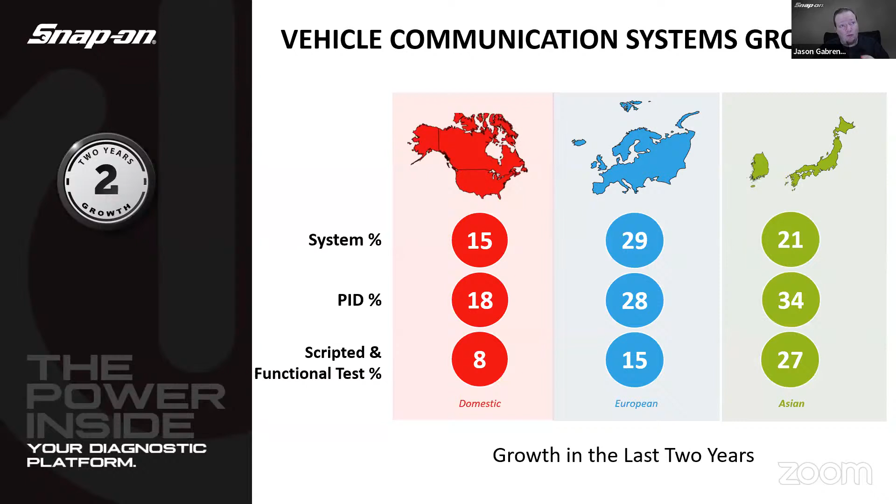So we're always adding that coverage, and we're really focusing on the stuff that's in the shops right now by using our SureTrack information, and then the repair orders and all that. We know what's in the shop, we know what's getting worked on, so we focus on what's being worked on right now.

And speaking of that, no one else in the industry can offer as much information as we do. 40 plus million real fixes, those real world complaint cause correction tips written by real technicians, billions of repair events, hundreds of billions of scanner data points helping provide our fast track intelligent diagnostics information, millions of fast track guided component tests, and over 22,000 total location images available.

So those are the color pictures that we started adding a couple releases ago, where it shows you an overview of the engine bay, points to where it is, and then we show a closer detailed look at where the actual component is.

There's over 1 million service resets and relearns. So if you have one of the tools that has that service resets and relearns menu underneath clear all codes, that's quick access to any of the resets and relearns on the vehicle based by job. And there's over 1 million of those available now.

Over 5 million fast track intelligent diagnostic PID flags. So if we think about the smart data tab that is in there, there's over 5 million of those available. And it's not just on engine, it's on body systems, chassis systems, and more. 700,000 more PID flags were added in this release alone, and that gets updated pretty regularly.

Talk about real fixes again, coming into SureTrack. So some tools have SureTrack, some tools have fast track intelligent diagnostics, but they all basically pull from the same data. Real fixes, hundreds of billions of scanner data points and billions of shop repair events give us over tens of millions, over 10 million real fix tips.

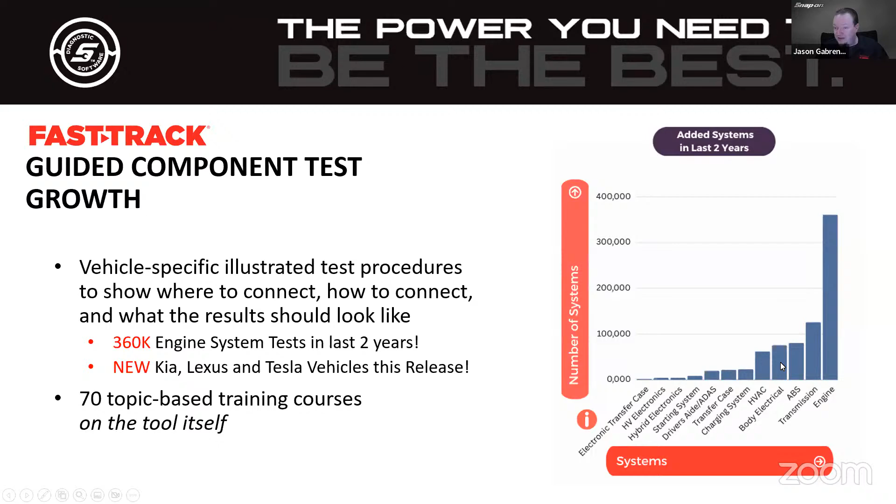We can also see over 100,000 more transmission tests added, almost 100,000 ABS and body electrical tests, and so on and so forth. I'll be honest with you, this very large engine number kind of skews the graph a little bit, so we can't see the detail at the bottom, but thousands and thousands of additional new tests were added every single time we do a release.

Also with this release, new guided component test instructions. It used to be we had small pictures with little arrows pointing on the tool where to plug in. Now they've been enhanced with much higher resolution graphics specific to the tool. Here we are connected to an engine coolant temperature sensor, and you can see the scope module there, with the black channel and the yellow channel, channel 1, and there's where to plug in.

And then down here we have the battery, and if we scroll further down, which I'll show you a little later when we go live, it actually shows you where you would back probe on the connector as well. A lot more detail added, and we'll be adding more of these as time goes on, as updates come out.

Location images, talked about that. The last couple updates we added these in, and with this release, 3,000 plus more new locations added. Here's an example that looks like a vent solenoid, and down here we have some variable valve timing actuators where they press on the center of the camshaft. So details like that—if I've never worked on this vehicle before and have a rough idea where it is, these detailed pictures help you and will point right to it.

Many locations also offer multiple images to provide a view of the area and a detailed view of the component.

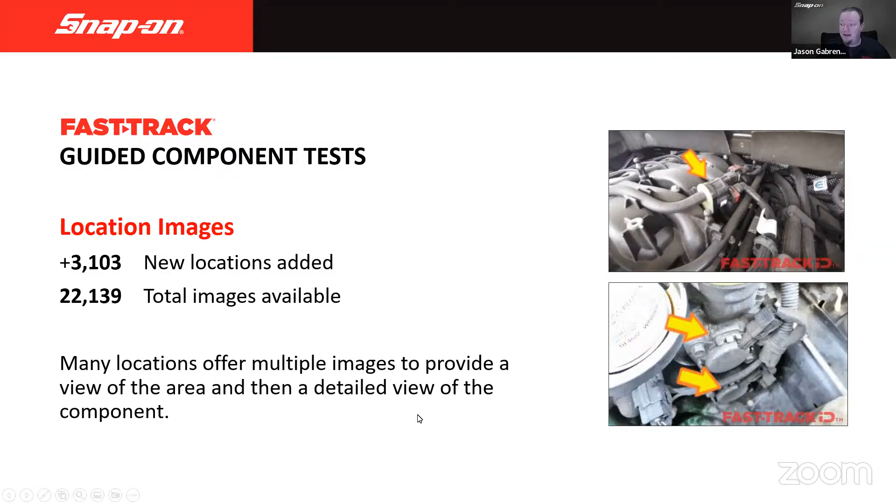As I said earlier, over 1 million service resets and relearns now in the tool—quick access to the work-related functions. So let's say I replaced the windshield. What might I need to do? It would have maybe a camera calibration test that I needed to do. Or I replaced the brake switch, or I need to replace brake pads. It would walk you through all those different tests and functions, filtered down just to the test, so I don't have to look in different modules to find these resets and relearns. It's going to give you the core repair plus any other associated component.

Fast Track Intelligent Diagnostics PID flags—if you go into the smart data, these are the min-max values, and they will monitor those PIDs, and if it goes outside of spec, the flags turn red. There's over 700,000 more added in this release, and over 5 million available across all the systems and codes that we cover. It's in things like transmission, brakes, hybrid vehicle and EV systems, tire pressure monitoring, body electrical, and of course we started with engine, so it's in there as well. More systems being added all the time.

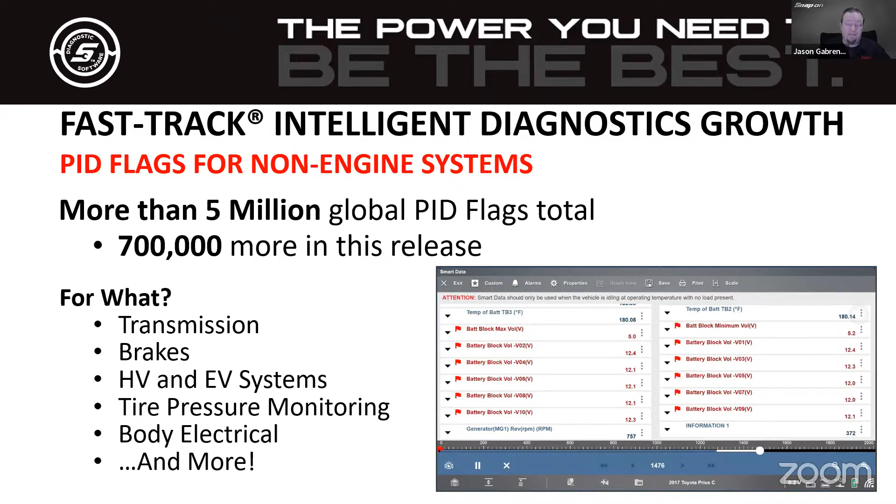We also have a new make added in Tesla. We're going to talk a little bit more in detail when we get further into the presentation. But yes, we have a new make in the tool that we cover, and it is Tesla, one of the highest selling vehicles in North America over the last couple of years. We have pretty darn good coverage on that.

Also new models—maybe we already had the brand, but some new models have been released. The Alfa Romeo Tonale, vehicle communication software, so that's your scanner stuff. The Kia K5 and guided component test added. Lexus NX series, the NX 250, the 40, the 350, and the 500H—guided component test added for those. And as I said, Tesla S, X, Y, and 3 vehicle communication software, as well as guided component tests in there. We'll look at that in a little bit more detail going forward.

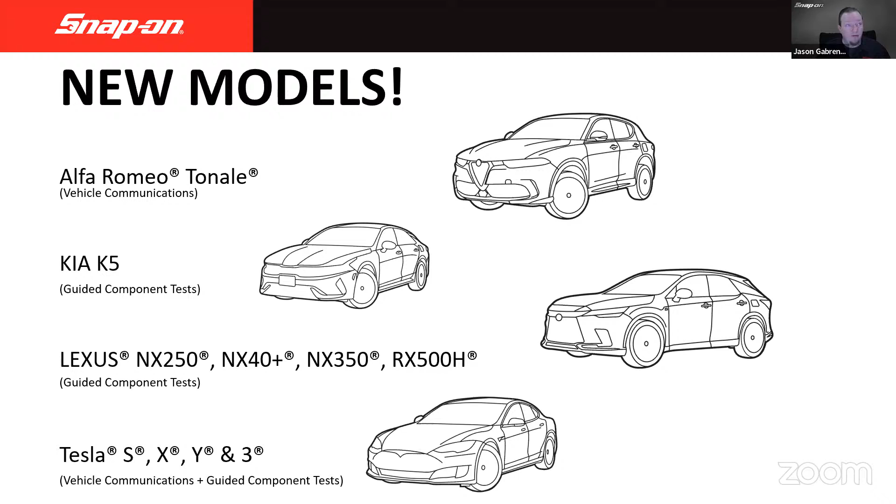2024 model year updates. At the beginning of the year, we always have at least code scan and clear on all vehicles because we know sometimes you might need to do a pre-scan on a vehicle with 5 miles on it that's brand new. So we have that in there so you can at least scan the systems. And then as we go, we add in more—the engine, transmission, body control modules, brake control modules, all those other modules, codes, tests, functional tests, all that good stuff.

Let's talk about, get a little bit deeper into the coverage highlights, so we get a little bit more of the detail as to what's going on here.

As far as Honda is concerned, on the CRV we have engine and power steering control module. On the CRV, Clarity, and Civic, we have intelligent cruise control module, actuator tests, and special functions for all of those. And 2019 and newer Passport got engine actuator tests and special functions added as well.

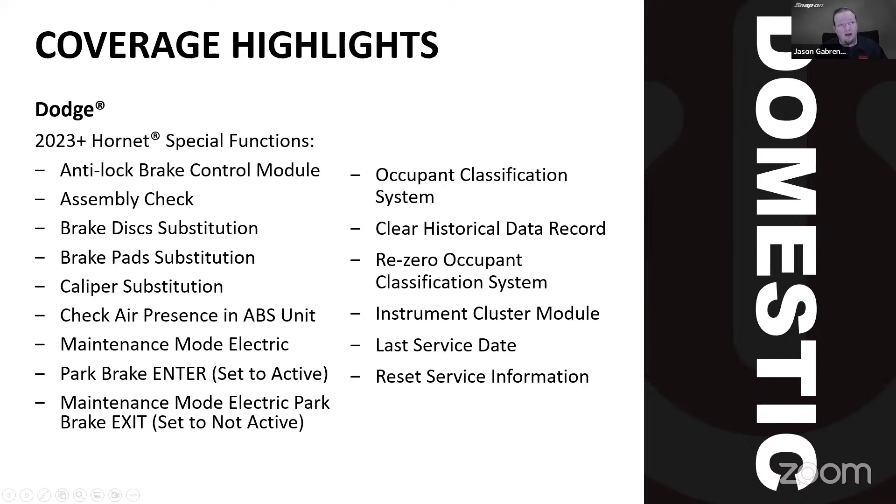Ford, this is a pretty large update for Ford. Actually, it's a very large update for Ford.

More PMI. We started adding PMI probably 3-4 years ago. PMI is programmable module installation. If you replace something on many newer Fords, you have to do this PMI, where you're copying the configuration information out of the old module and pasting it into the new module, because it needs all that configuration information. For example, changing a steering rack on an F series, you need to do that, and that capability got added a little while ago.

In this case, just some samplings of what got added: 11 to 17 Mustang for the power steering control module, for if you do a steering rack on that. Focus restraint control module, if you do that, you need to do PMI on that. 2023 and newer F series and Super Duties got new engines, so we get support for the Raptor, 6.8 to 7.3 gas engine, and the 6.7 diesel. And then 39 different new body control modules across the Ford landscape that weren't able to be accessed before are now able to be accessed, plus 2020 and newer F-150 special functions for ABS, the engine, occupant classification module, and the automatic headlamp leveling system.

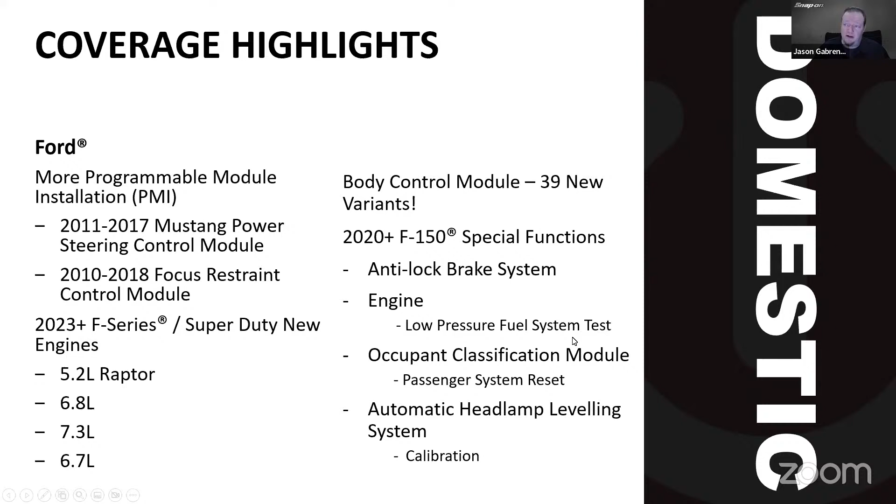This low pressure fuel system test is going to show up in a couple places, for example on the 2021 and newer Bronco. We added electronic power assist steering, a bunch of new tests in there, and that engine low pressure fuel system test, which can help you check for leaks—it automatically pressurizes the system and checks for leaks. And then the occupant classification module, if I need to reset the passenger seat, perhaps, if I replace the seat or anything like that, I might have to recalibrate that seat.

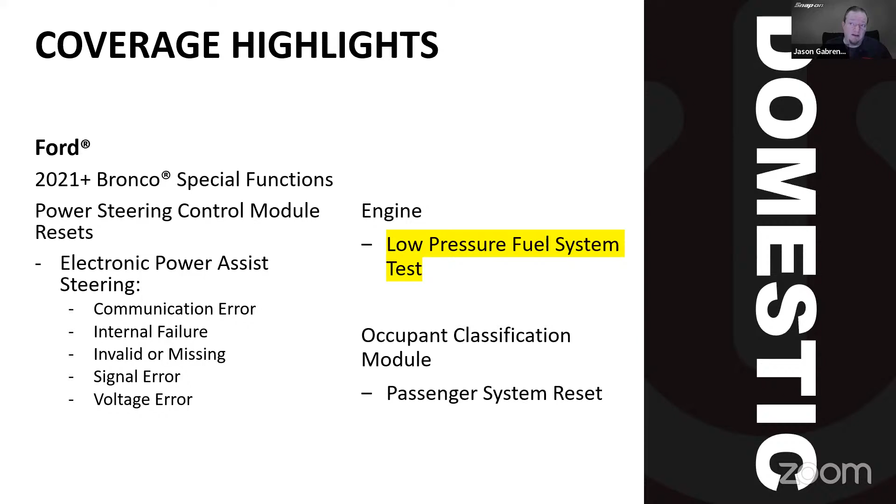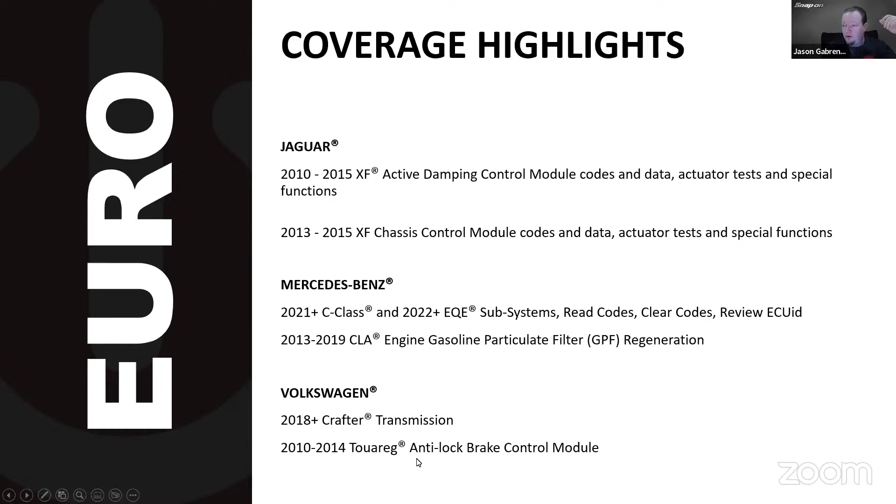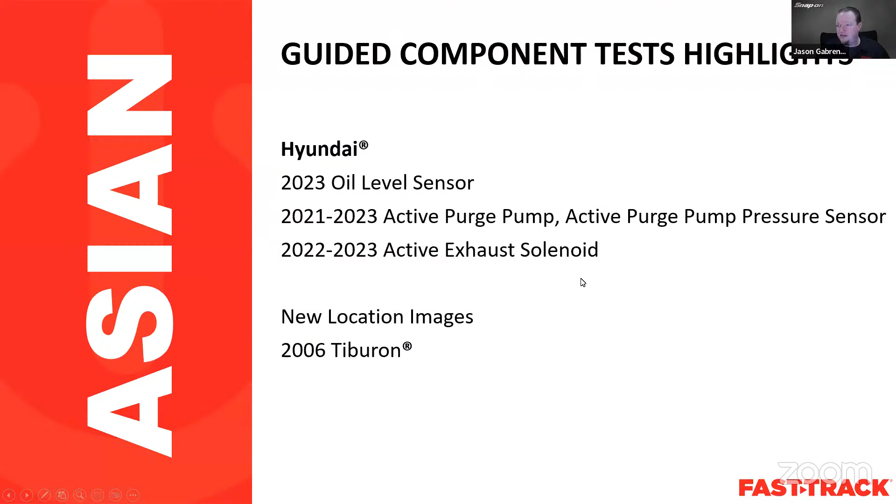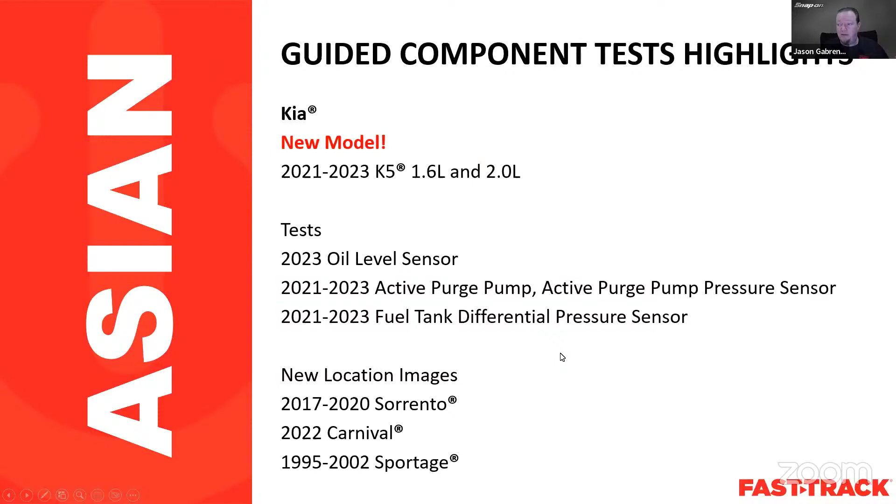Hyundai 2023, oil level sensor, active purge pump pressure sensor, active exhaust solenoid, and new location images added for the Tiburon. Kia's new model of the K5 on the 1.6 and 2 liter, all sorts of different things available. So like the oil level sensor, the purge pump, fuel tank differential pressure sensor, that could be helpful in evap diagnosis. And new location images on the Sorento, Carnival, and Sportage.

Chevy Colorado Express, Silverado, Camaro, Trailblazer, and Equinox, all new engine coverage. The 3-liter diesel engine in the Silverado, the smaller diesel that they introduced, so coverage on that. Increased coverage for transmissions on the 6, 8, and 10 speeds on the Silverados. I know that's been highly requested, so that's in there, so you can test the solenoids and things like that.

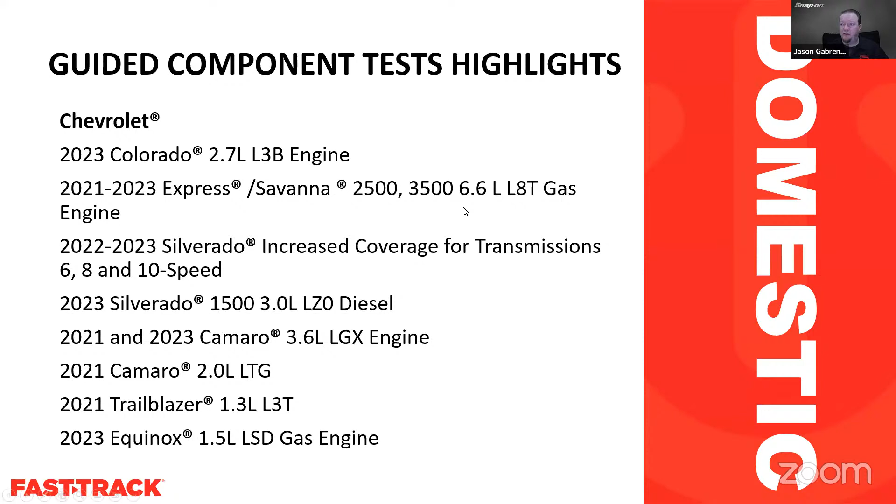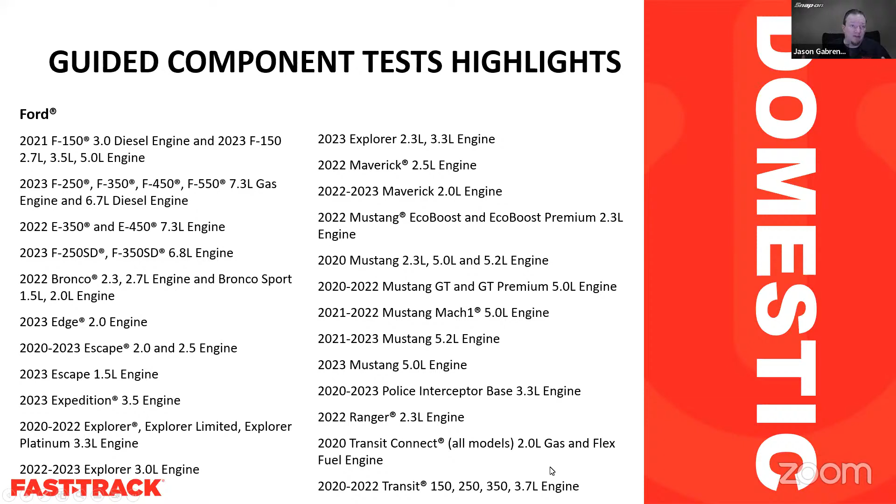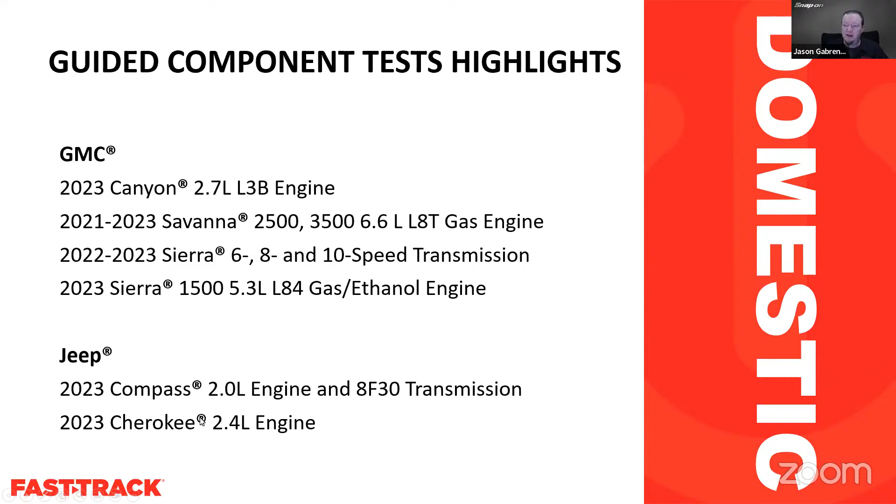GMC is going to pretty much mirror what we did in Chevy, since they'll match Silverados to Sierras and so on. So more transmission stuff, more on the 6.6 liter gas, the 2.7. Jeep Compass gets coverage on the 2 liter and the 2.4 and the transmission.

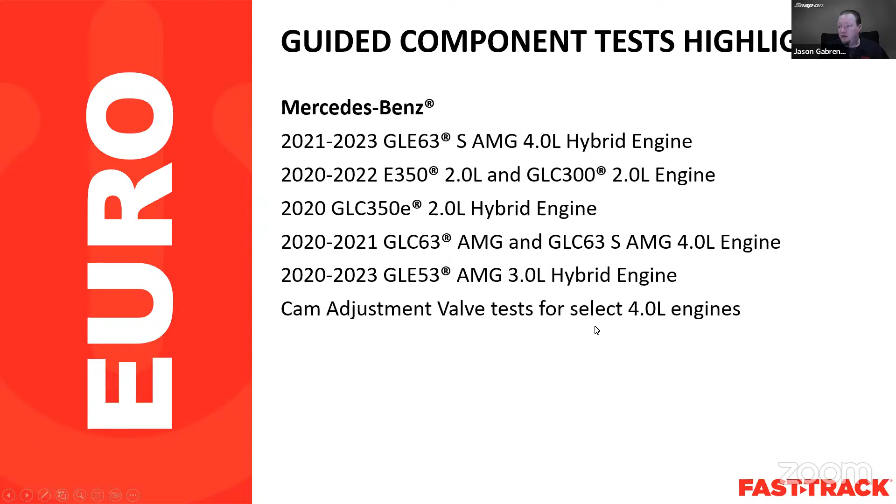Mercedes-Benz, AMG hybrid engine, a couple other hybrid engines there. Cam adjustment valve test for select 4-liter engines as well. That was a customer request, to be able to test those systems, so that's in there now too.

So that's the software, like the inner workings, how I'm going to communicate with the vehicle or test stuff on the vehicle. We have other things that also kind of go along and tie in with this as well.

Solus Plus, existing and new ones, once they update to 24.4, the fall update, now have the option to change to Spanish. I know we have a lot of Spanish-speaking folks out there that use our tools. If they have a Solus Plus and update it to 24.4, it will display in Spanish. The majority of the tool will be, though there are some things we'll talk about in a little bit, like some stuff in SureTrack that's still in English because it hasn't been translated yet.

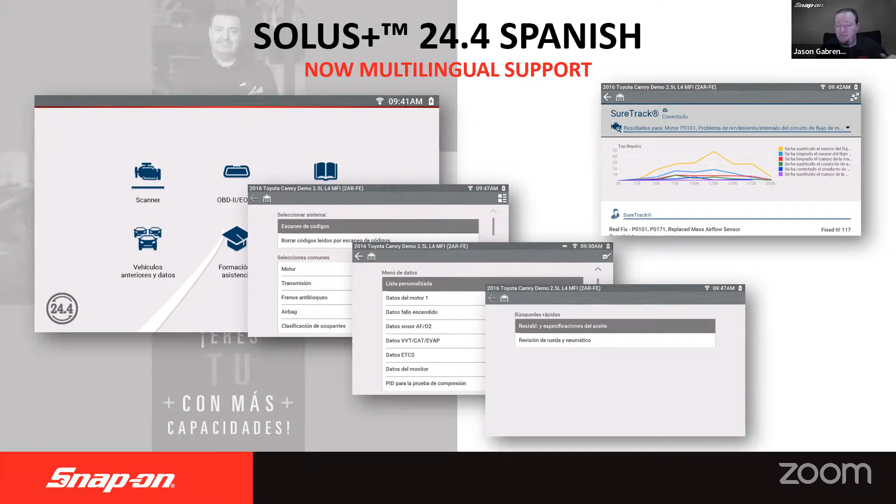But all the menus, the PIDs, and so forth will be in Spanish. I'm going to walk you through how to change it and change it back, and also show you a few of the things on the tool. We'll go live on it in a minute.

Also with this, due to it being multilingual, if I upload a pre-scan, a post-scan, an ADAS report, anything that goes up to the Snap-on Cloud in English or Spanish, I can then switch it back to English or Spanish up there. It has a tag that allows it to be switched back and forth on the Snap-on Cloud. We'll go in there in a minute and I'll show you how. On the report itself, there's a little toggle, and you can toggle it between English and Spanish.

So let's say you have a Spanish-speaking person using the scan tool, and they upload the scan, but the service writer doesn't speak a lick of Spanish and wants to turn it back to English. They could do that. Or maybe the customer does speak Spanish, and you want to translate it for them so they can see it. It works both ways, which is pretty helpful.

Also on Snap-on Cloud, this function doesn't affect the reports or uploads, it functions with the menus and things like that. There are 8 different languages available: German, English, Spanish, French, Italian, Dutch, Polish, and Portuguese, all available from this menu, and I'll show you how that works too in a little bit.

So the user-generated text does not change, meaning things like your uploads. Those get changed at the report level, and right now, as I said, it's English to Spanish. On the navigation, the menu, and everything else, this setting will change that.

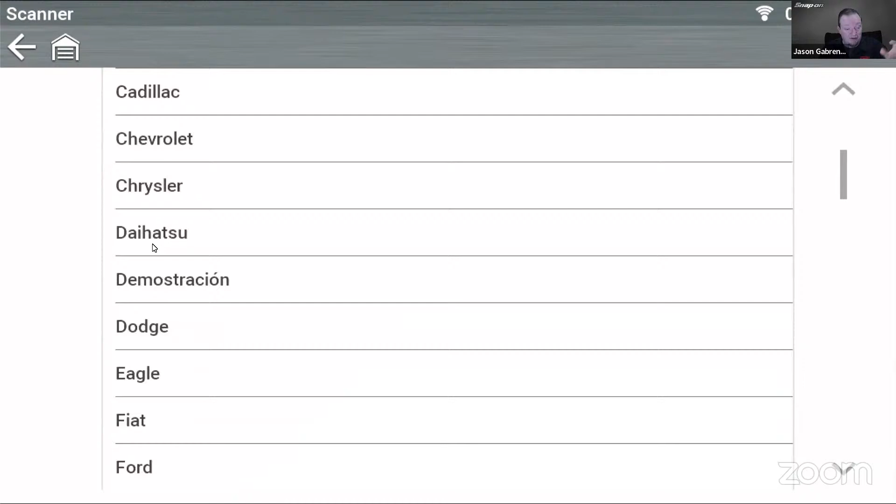Now, scanner, we know that scanner is pretty universal between the two languages, so it doesn't matter what language you read, you know what it is. Same thing with OBD2, that's just a spec. So I will go into scanner, and we'll see that most of those are universal across languages too, except for like demonstration.

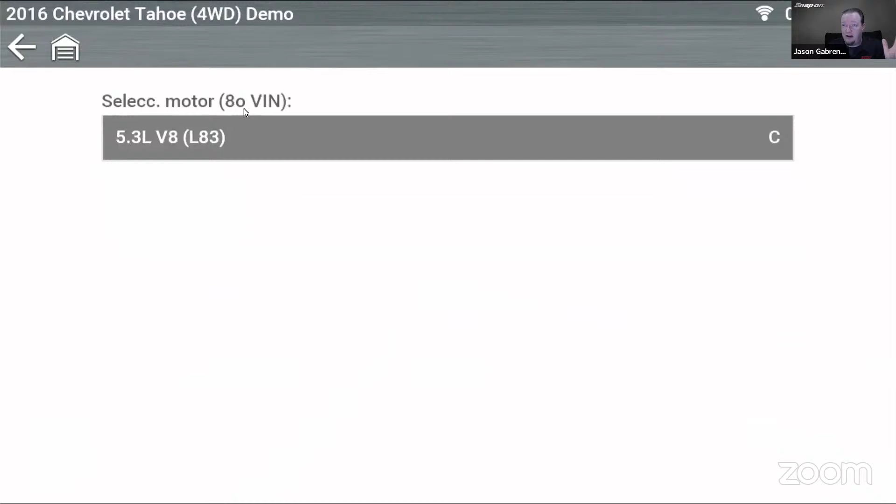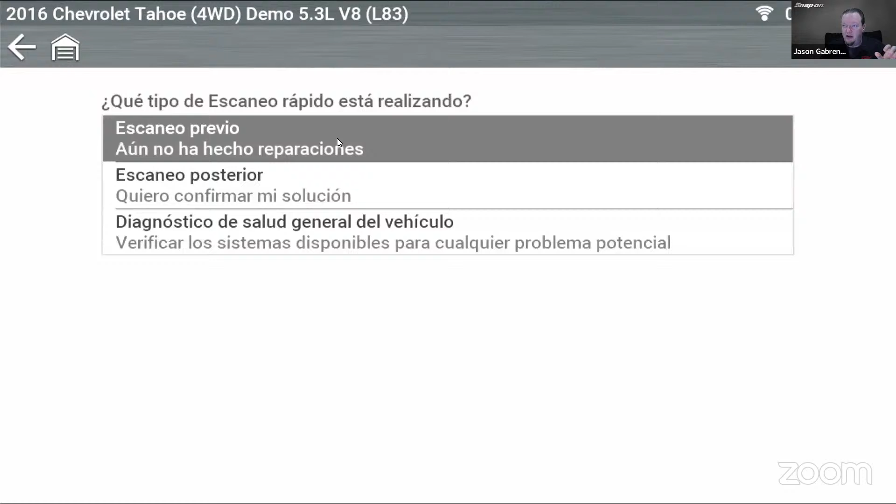I'll just pull up my trusty old Tahoe here. You'll see on the top it says the different VINs and stuff like that. Everything in that is in Spanish. All of that is in Spanish. Accept, continue. And then we want to do a code scan on that. I'm going to do a pre-scan. Don't want to add new stuff. And it goes in. Notice how all of that's in Spanish.

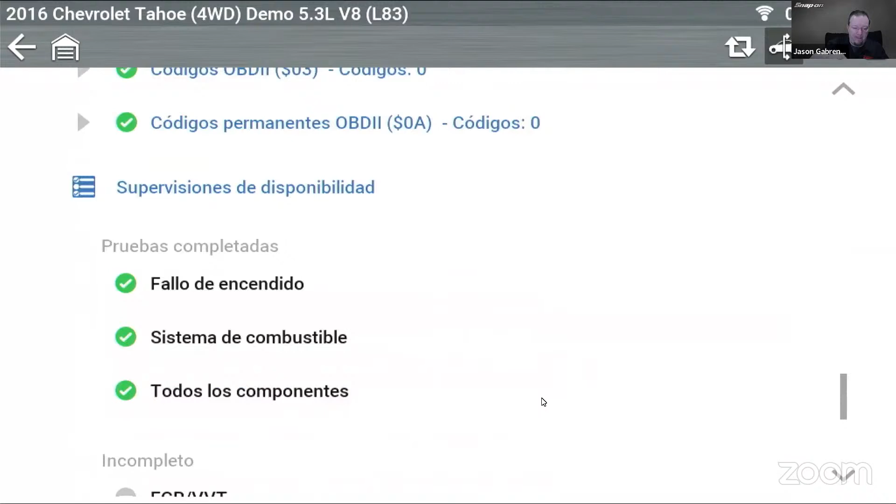Scroll through, all the modules are in Spanish. And even now, if I wanted to go into the engine, for example, and look at data, let's just say engine data. That's all in Spanish.

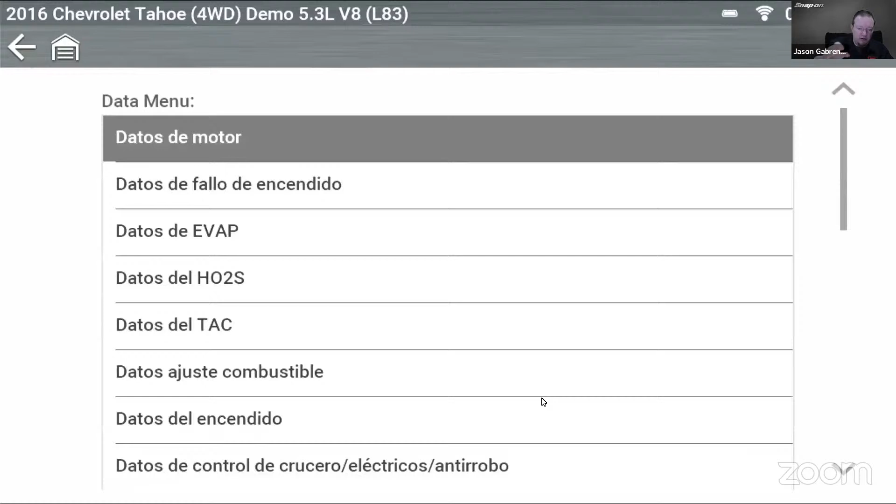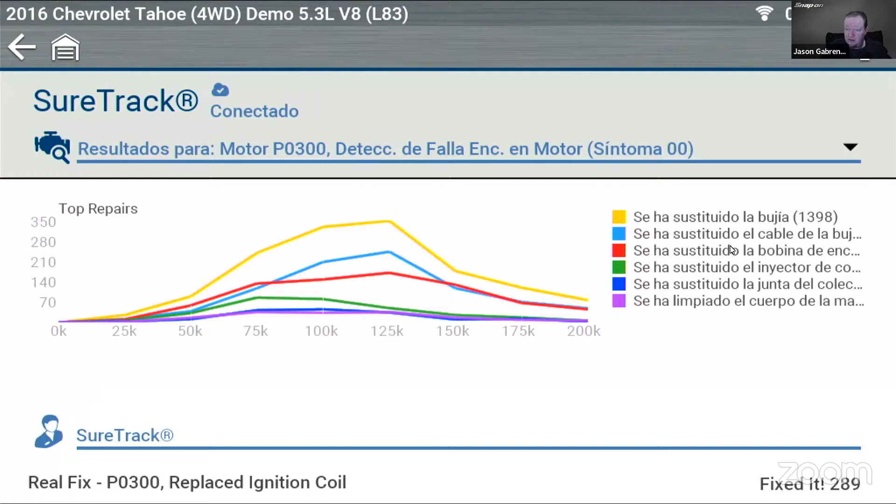And then if we go to SureTrack information, this is where that one little difference is. So in the SureTrack information, the top repairs graphs have been translated. But down here, under the SureTrack information, this has not been translated. So this will still be in English.

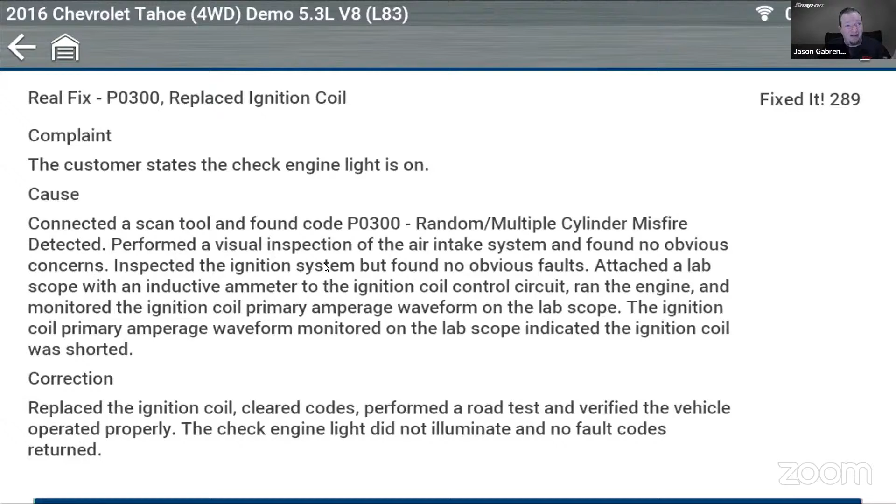And that answers the question of why is it the Solus Plus only and not the other tools getting the Spanish? With time, perhaps it will. But there's a lot more translation that needs to go on in these things and the other, like, fast track intelligent diagnostics stuff that needs to go on before we could do that.

So this is still in English, but that's in Spanish. And then if we come down here, the cards are in Spanish, but when you go into there, the articles are once again in English. So just be aware that that's going to be your difference right there. So that's why the Solus Plus is in Spanish and the other ones don't have it.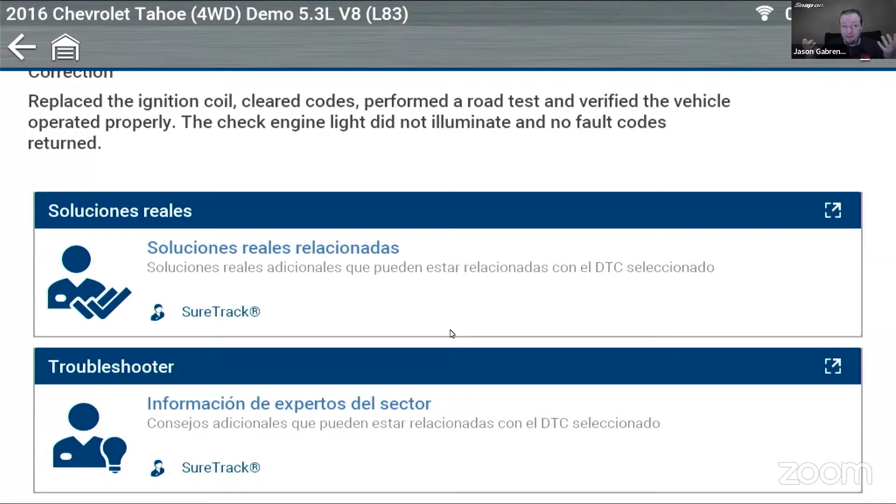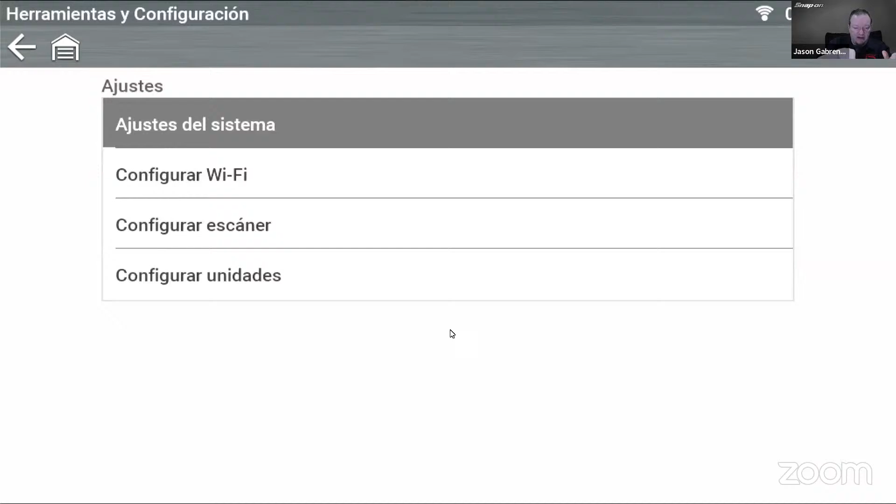So let's go back and switch it back. I'm going to exit my vehicle. I'm going to go back into my gears for the settings. Gears again down the bottom. And then the first one is system settings. And if we go down the bottom, we see idioma, that is language in Spanish. Go in here, go to English, and we're back to English. Easy enough.

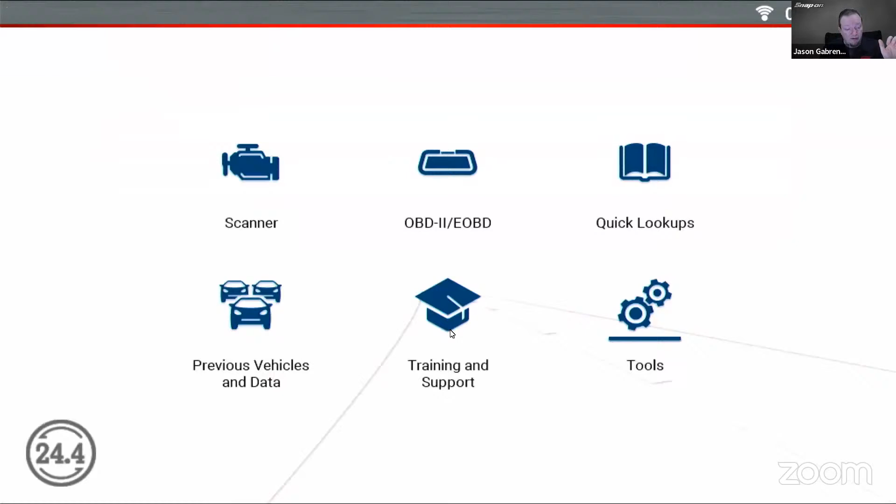Quick view on that. All right, let's go to, pull this up. It's down here. And we'll go Altus Drive.

Just log in real quick. And no.

Okay, so there are all of my uploads here. And I'm just going to go look in the, so the Solus Plus, when you do uploads, it also uploads the scan tool part number, just so you can look things up like that. So here's an example here, vehicle system report, that is in English.

If I open it up, it's in English. Close it, go back, see it's in English, pull that tab down, go to Spanish. Now it's in Spanish. I open it up, comes up in Spanish. And I can switch back and forth just that easily. Go to English, go to Spanish. Go to English, go to Spanish.

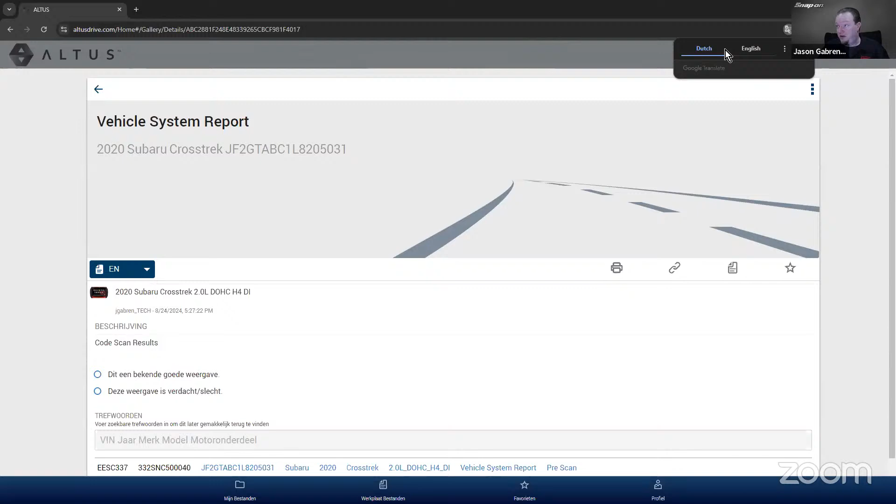Now, as far as the website navigation, things like that, we go up here on the right, and we can change it into German and so on and so forth. So let's say I want to change it to Dutch. And yeah, even Google recognized that it's in Dutch. So there's some Dutch right there. There's some Dutch right there. There's select in Dutch, right?

So we can see just the words, menus. Look down here on the bottom, we can see the different menus. Those are in a different language as well. So then easily enough, just switch it back to English. And there we go. All right.

So a couple great enhancements for our global folks who are working around the world, or maybe you just prefer your native language when you're navigating the website. That's fine too. We have that capability.

All right, let's look at my notes out here. Let's see, did that. All right, next one. I'm going to go in here now. I'm going to do a little comparison, right?

So this is the spring software update 24.2, and I'm going to go into guided component tests, and I'm going to pull up a Dodge. Actually, I think I got it right here. Yeah, I do. Dodge Charger, 2022 Dodge Charger. I'm going to activate it, go into guided component tests.

Go into engine, and I want to pull up, say, the oil pressure sensor and do a voltage test. And you'll notice we do have the connector views. We've always had the connector views, but there isn't that hookup view that I showed you earlier.

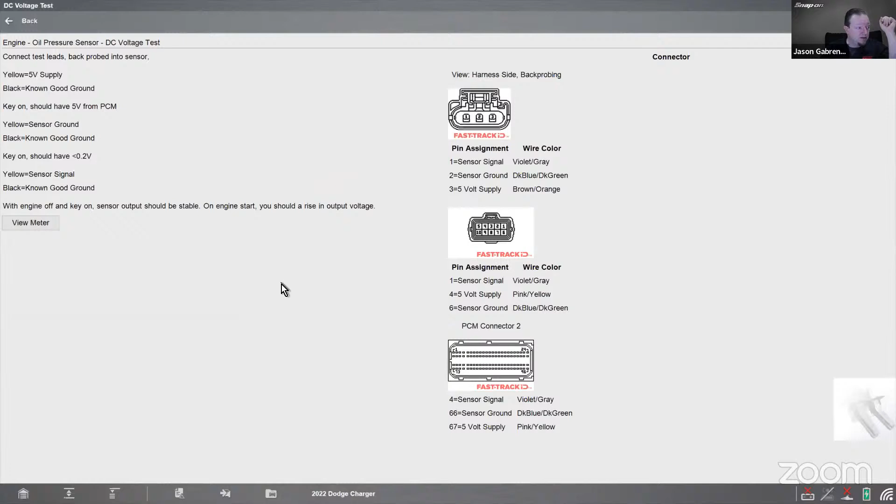So if I switch over to my updated tool and go to my previous vehicles, Dodge Charger. Now this is a 2023 Dodge Charger because we can't even do 2023 Dodge Chargers in the older software, it's not listed. The oil pressure sensor here, DC voltage test, and then there are my high-res graphics, right?

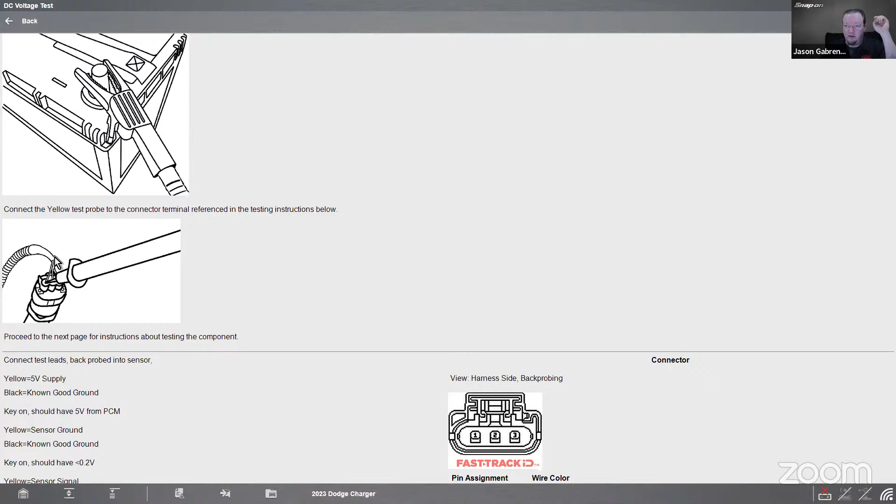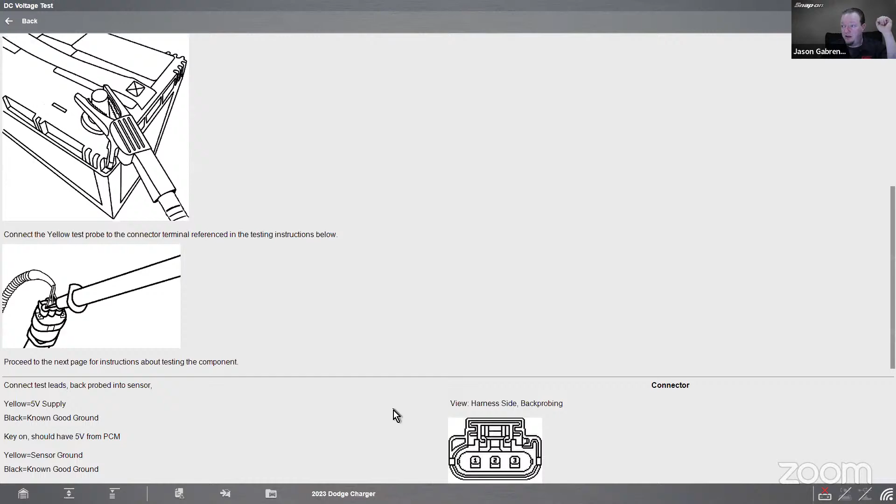So there's my scope module, there's ground, there's channel 1, I can plug it in there. There is my ground, and if we come all the way down here, there is showing back probing at the connector terminal, and then, of course, the connector terminals down here. And actually, if you look at this, those look a bit bigger than the other one as well. So it looks like maybe they've increased the size on those, which is another not bad thing, especially if you're hard of seeing. Okay.

Next one I'm going to show you is the Ford fuel test, so on the Bronco.

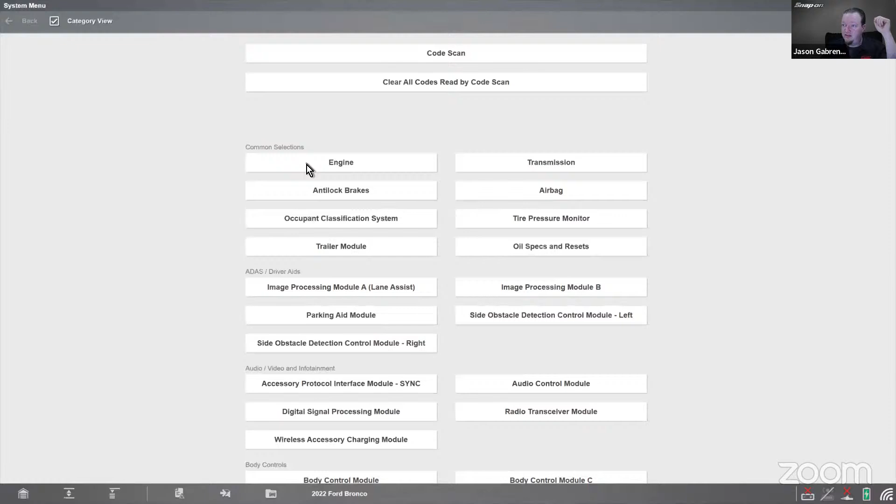I'm going to go into the engine system, of course, and we'll go into functional tests, and it's a special function. And we see I have 1, 2, 3, 4, 5, 6, 7 different functional tests, including programmable module installation.

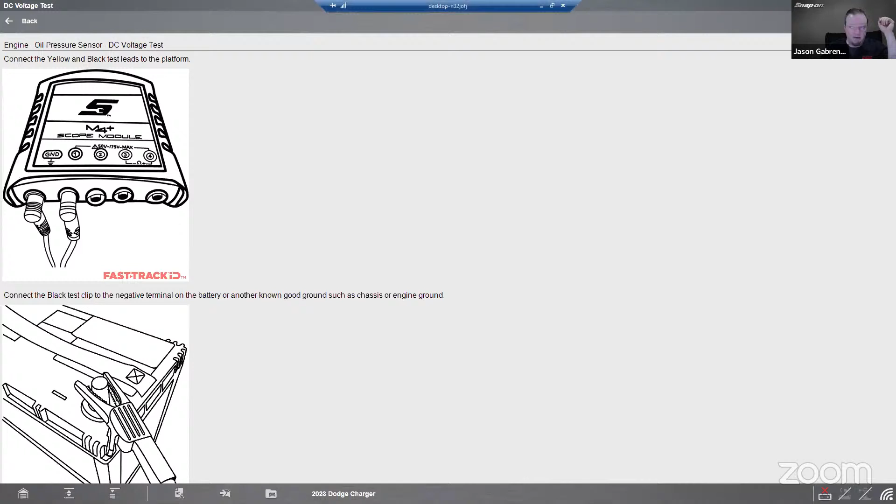If I go over to my other one, do the same thing. On scanner, engine, functional tests, special functions, 1, 2, 3, 4, 5, 6, 7, 8. And the new one is this gas low pressure fuel test for direct injection.

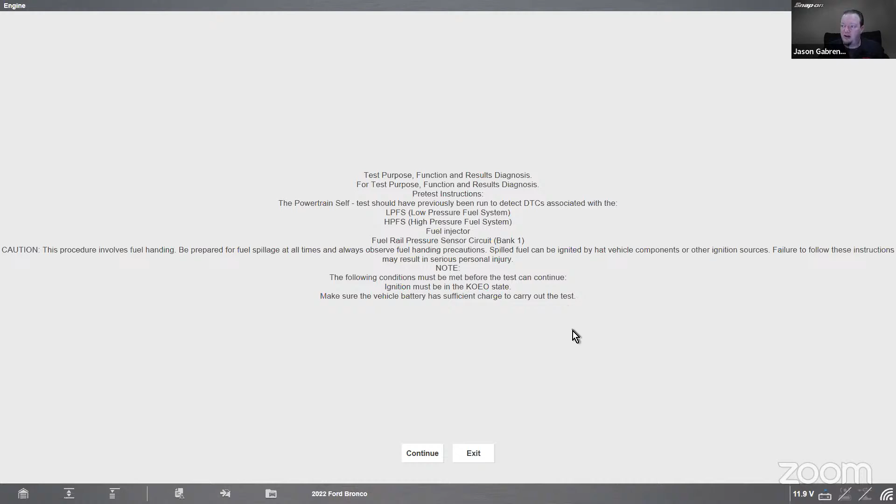So I click on that. It's going to make sure we turn our ignition on. And it says for this test, powertrain self-test has previously been run to detect DTCs associated with low pressure and high pressure fuel systems, fuel injectors, fuel rails, etc. Ignition must be on, key on, engine off. Make sure the vehicle battery has sufficient charge to carry out the test. Continue. Oh yeah, it's behind security as well.

Secured functional test. And then what it's going to do is turn the pump on and off, and check for pressure drop. So in this case, our low side fuel pressure is 386 on, 386 off, and then it will check for a drop. In this case, it goes for 10 seconds to find a gross leak. So if it has a very large leak, it's going to leak down a lot faster. So it's going to do a measurement there.

Good is, now this is a simulator too, so it just throws the same numbers in there. But it also shows you what good is. So on pressure should be here, off pressure should be here. So if this was a normal vehicle, that would be okay. Gross leak pressure has got to be greater than or equal to 186 kilopascals. And then it'll show you the drop up here. It has 0 drop, which makes sense.

And now it's counting down in the bottom corner here. It's a 60-second leak down test. So if I have a smaller leak, it would take a lot longer to leak down in that case. So I've got about 15 seconds, I'll take a sip of water. Give it a few more seconds. This does go through the whole test on the simulator, so that's good.

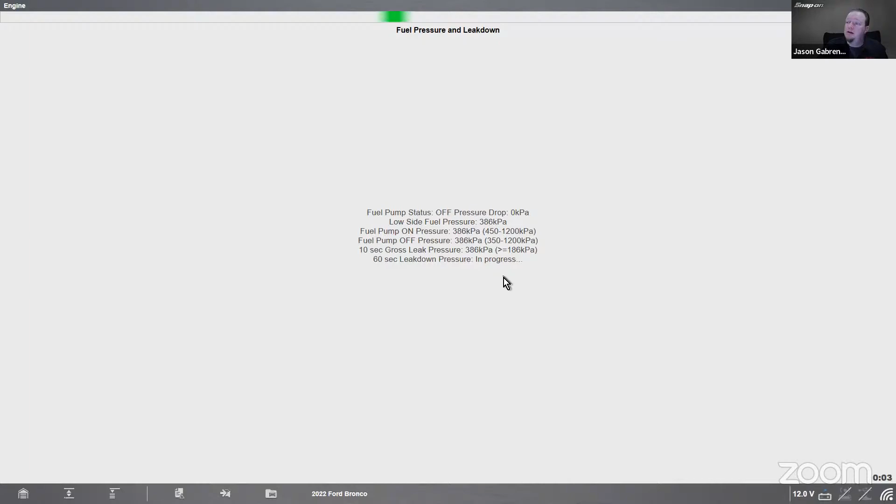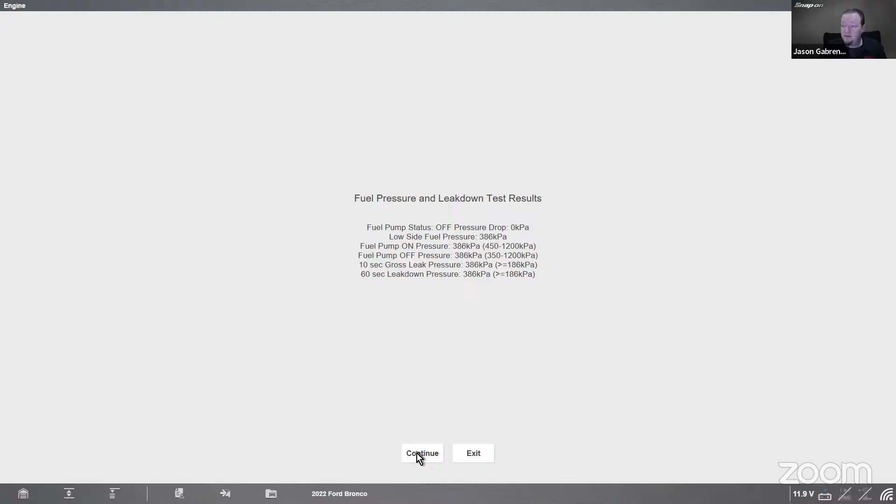Tells you whether the pump's on or off at the time, what the pressure drop was measured. And in this case, there's your final results. So it's an automated test, takes about 75 seconds or so. Maybe take a little longer on a real car, but I would say under 2 minutes on that, so be able to check that. Pretty helpful. Then turn the ignition off, and you're good.

All right, now the other two, well, we don't have those on the older software anyway, so there's nothing to compare. So I'm just going to pull up this Tesla. This is a 2016 Model S 70D, so that's a dual motor, 70 kilowatt hour battery. I'm going to go into scanner and let's see what we can find.

So we can either display the active ECUs on the vehicle or all possible ECUs. In this case, I just want to show you what all could be on there. We can do a code scan through the whole vehicle, and we can clear all the codes with the code scan.

And then we can see down here common selections like occupant classification system, right? The weight thing in the seat. Special functions - I can go in there and do resets and airbag occupant classification re-zero. So that's pretty common on a lot of vehicles. Got that in there.

On a lot of these modules, you are going to see a lot of hard resets, reset ECUs, and soft resets, because a lot of times that's how they fix problems on these cars. A lot of the problems, unless it's been like a collision or a chassis problem, electronically in the computer system, oftentimes it's just reset it, unplug it, plug it back in type thing, but doing it with software. Or oftentimes they'll force a software update over the air to the car and that fixes the problem - it's like bugs and glitches that they find. So a lot of these modules, if you go in there, you're going to find that's what it is.

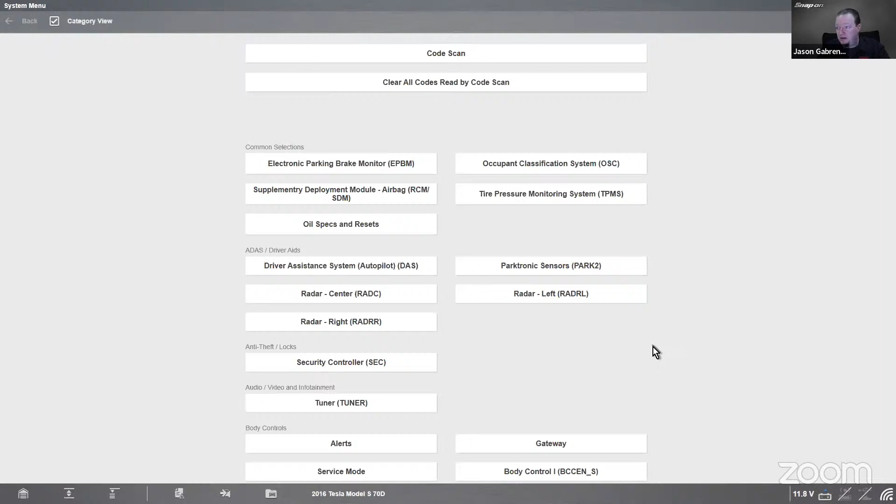Back up here, coming down to battery management system. So obviously the thing's basically a giant rolling battery. So special functions in that - there's a lot of contactor stress tests, reset the counters. These are different trouble codes that you might find in the battery management system, so it resets those. It just goes in and performs a reset.

Like, watch, I just do that - reset the battery management system alarm. Going to go in, give it a second. There we go, it's done. That's all it does, it just does a reset. If you have that code and you've diagnosed that it's not a problem, you can go in and reset it. Simple as that.

And if we go all the way down to the bottom, we see the air suspension system. This is another one that has a couple different functions - there's a bunch of other different modules that have different functions too. But hard reset pressures, so to read the pressures that are in the air suspension, set the ride height from very high to very low, and then once again, hard and soft resets.

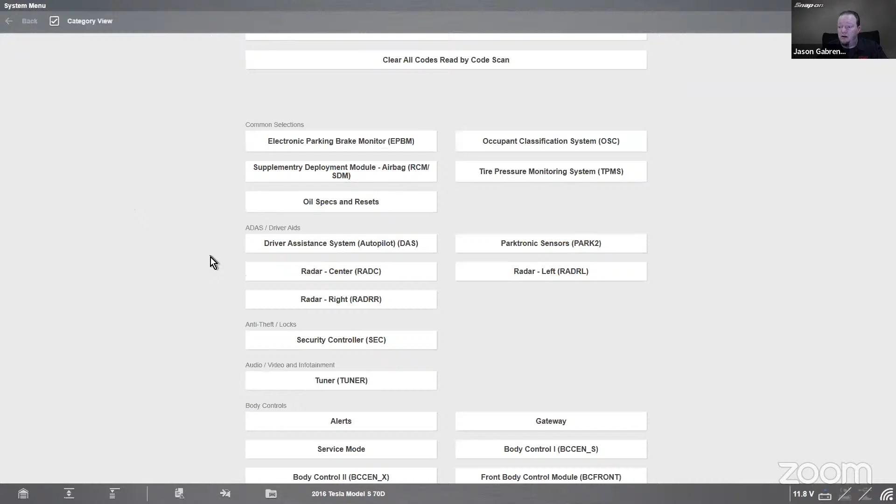Also in these, there's a component test, like I said. So ABS - there's different things we can test, like wheel speed sensors, signature tests, right? So it shows you where to connect, shows you what the connector looks like, and all the way down there's what your waveform should look like. All right, so all that stuff available for the ABS, at least to start.

And then also, not sure if you are aware, if you use ShopKey or Mitchell, ShopKey and Mitchell have Tesla information in there as well. So let me pull this up real quick.

Okay, now I will tell you they piece them all out by each individual model, and the repair order data is tied to the model. So 70D is the one we chose. It's got to load through all my options. Using this vehicle, you're going to see, in this case, 7 repairs - that's on a 70D. The 60D's got a different number of repairs, the P100's got a different number of repairs. So they're kind of spread out right now, plus I don't know how many aftermarket shops are working on Teslas. I'm sure there's a fair number of them, but as the data comes in, of course, we get more.

But things like pads and rotors, tire pressure sensor, headlight bulb, control arms, alignment, lower control arm, brake pads, things like that. Power window motor regulator - I have seen there's a fair number of problems with those. Same with the door handle - oh, there it is, door handle right there, right? So we can see what people have been punching in as well, looking stuff up. So that information is all available.

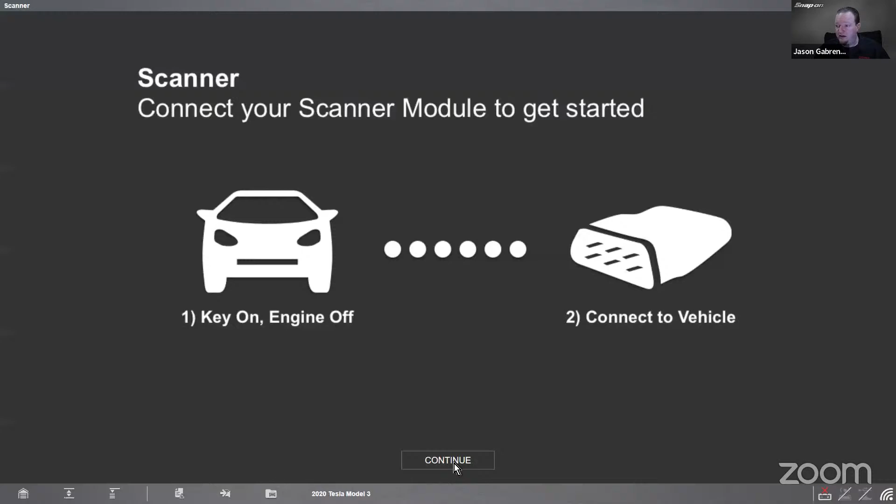On a newer Tesla, like this 2020 Model 3, what that's going to give us is information on alerts. This was also in the Model S as well. But display service alerts - enter service mode, then tap service alerts, and it'll tell you about either service fix or customer alerts. Service fix alerts can include important issues along with non-issues - it's common to see service fix alerts that are not important. Customer alerts are the same as those that show up in the display during normal vehicle operation. So that's what you would do.

And then to unlock service mode, it gives you the information on how to do that. Enable service mode on the touchscreen. So you're going to touch software, hold the word model, and type in service to access it. Then you use the user interface of the touchscreen to diagnose the vehicle. To disable it, this tells you how to get out of it, so you can just exit service mode as well.

For some functions on the vehicle, you may need to unlock the gateway. This procedure will unlock the gateway for 90 minutes, and it counts down in seconds for some reason, but you'll see it count down on the touchscreen. It will lock when the timer elapses or when leaving the vehicle and closing the doors. If the gateway needs to be unlocked longer, just repeat it.

So that's the functionality on the non-OBD2 port Teslas. You can still go in there and access it through the touchscreen, and it's pretty comprehensive what you can do with the touchscreen on there. Pretty helpful.

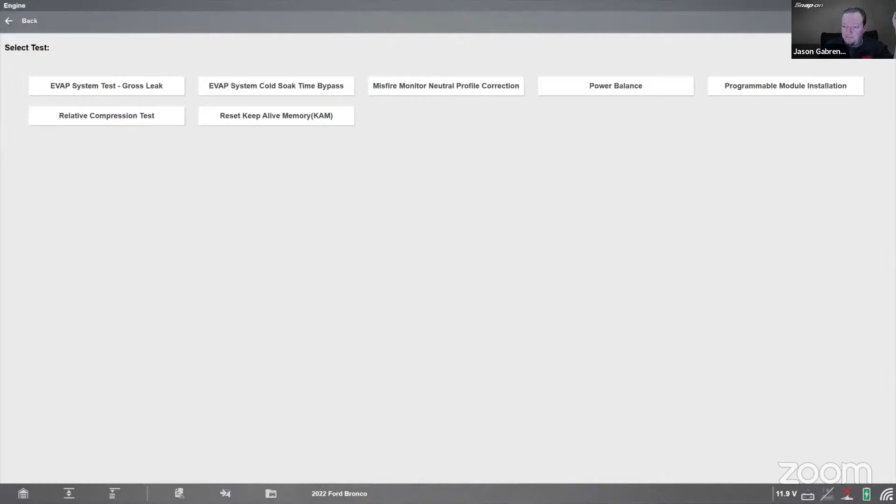Let me show you here real quick. I think it was on this one. Oh, maybe not, well let's see - on the vehicle history. What did I work on? Take screenshots - no, it was on the Tesla. Maybe on the other one. Tesla.

So if you have a Zeus or a Verus, you come down to the vehicle record and you'll see a cloud icon. If it's got a check mark, that means it has uploaded. If it's white, it has not uploaded. It's going to be very similar if you go into previous vehicles and data on a non-Windows tool. You would see a white cloud or a cloud with a check mark, so that'll tell you whether or not it's uploaded.

And if it's uploaded and you're not seeing it, then you might have two accounts. I would say you might want to call customer care in that case. But I think those other three things that I mentioned should sort you out. One of them is probably not correct. Thanks for the question.

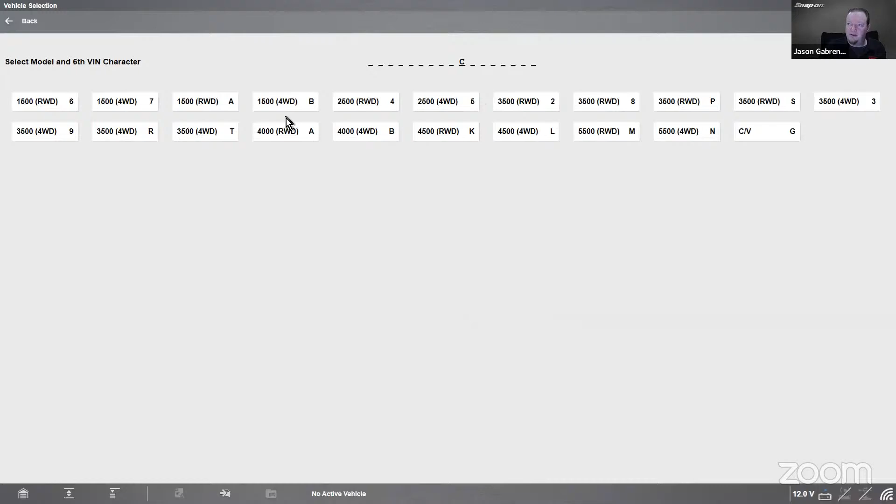Enhanced force regen for Ram 6.7 diesel engines. I've never been able to do a regen on these to date. Well, let's take a look. Can you give me a year, anonymous attendee? I think I've looked one of these up recently, maybe a 12, and I was like, maybe not. Could you give me a year, please? Okay, 11 or 12. Like I said, I think I looked one of these up pretty recently. So let's say like a 2500, 7A engine.

So there are 5 variants, I will just pre-warn you with that. So the test might only show up in some variants and not others. I believe it's a system test. Let's see.

Stationary Desoot right there, and you want to, yeah. So stationary Desoot is what they call a regen on those, so you'd be wanting to look for that. And that would bring it through the stationary reset process, up to 80 minutes to complete, plus need a warm-up time before the Desoot begins. So it will take a while. You also want to park it away from stuff. I don't know your experience with regens, but make sure there's nothing that can catch on fire around the tailpipe if you haven't done it before.

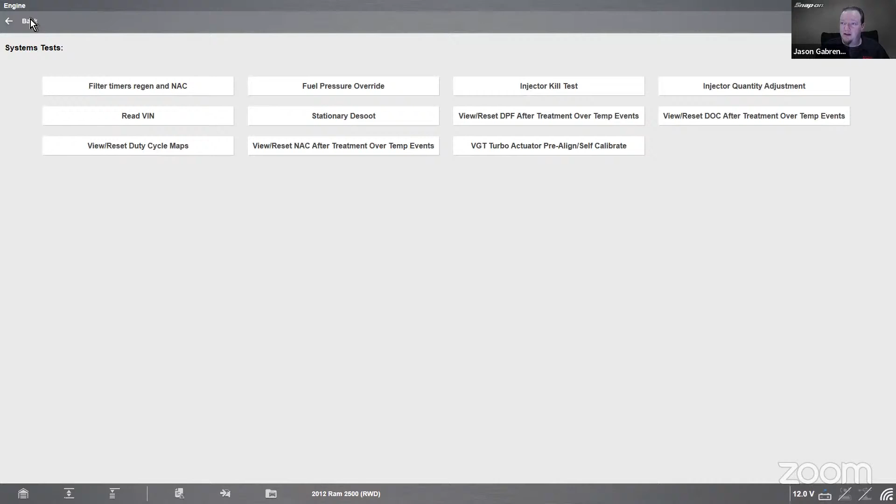Okay, so let me back up. Yeah, so hopefully that answers your question. It would be, and that's been in there for a little while. So I don't know if that's exactly what you're talking about, but there is some confusion there where they call it something different. It is called a stationary Desoot, so it just kind of throws people off. Hopefully that answers your question.

Jose asked, for Tesla, do I need a DLC connector? Can I connect to the scan tool? So on the 2012 to 20 S's and the 16 to 20 X's, they have just a regular 16-pin connector and you can plug in, do a code scan and all that other stuff I was showing. If it's a Model Y or a Model 3, they don't have a 16-pin connector, so you would just do it through the touchscreen. There's some stuff you can do on a Model S and a Model X on the touchscreen as well. And then also on the newer S and X models, like 21 to 23, I guess, those don't have a 16-pin connector, so you just do that through the touchscreen. But the scan tool tells you how to get through there. After you do it a couple of times, it's pretty easy to remember, but I'll walk you through and give you that information so you can get in.